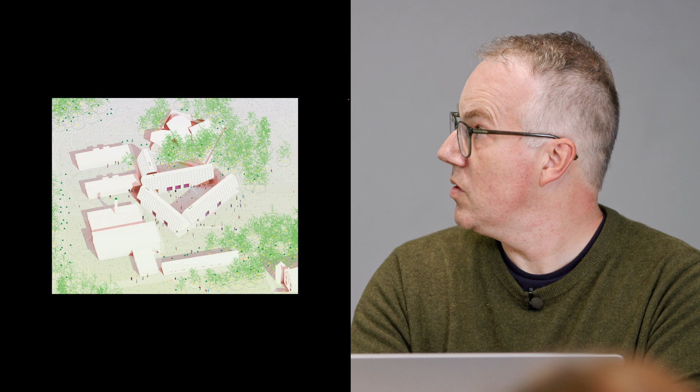We were lucky to get this project early on. It's basically a series of studios that are part of a larger campus plan, where we were trying to really focus on these spaces between. This is a house by Jorge Pardo. These are sort of traditional, almost vernacular sod roof buildings, and this is a kind of modernist art building—I think it's for ceramics or something. But we were doing the architecture school, the architecture program, photography, graphic design, I think.

The budget we were given was like the equivalent of doing an industrial building essentially, and we basically followed the material palettes of nearby industrial buildings. These are all cement panels. The only thing we did was use these hat channels between the panels, which are polished stainless, so they glisten in a funny way when you move around them. And then we really focused on these spaces, and pushed, asking them to put all these chairs and tables in these connecting spaces outside.

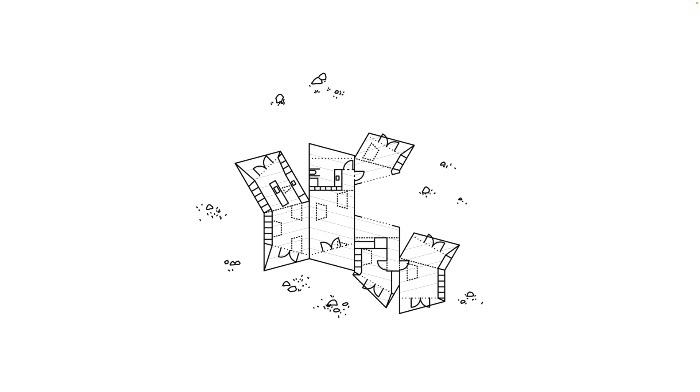I'll go faster. This is a guest house visitor center for a piece of land art in Las Vegas, New Mexico. It's done with SIPs—this is an early project as well. They're all small scale. I think I give everything in square footage, which might not translate, so you just take the zero off and think of it as square meters at the end. So, 150 square meters.

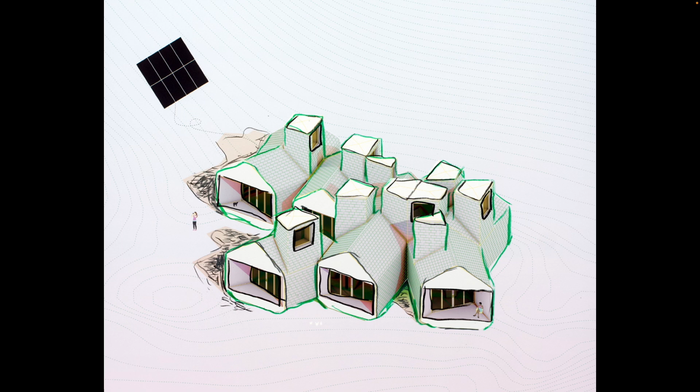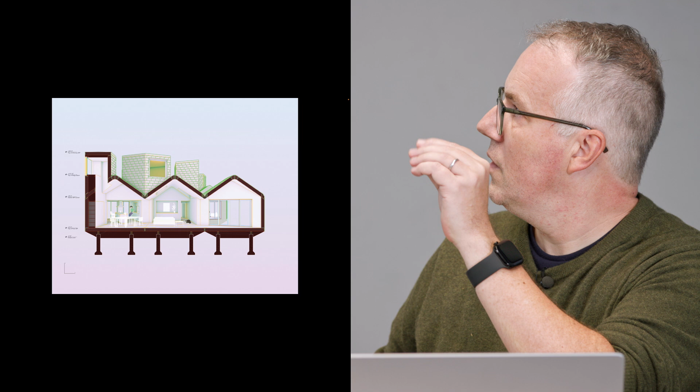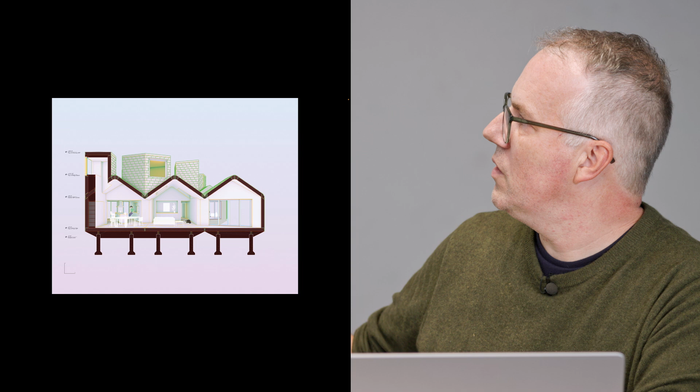These are done with SIP panels, very prefab construction, totally off the grid. In terms of material ecology, we found all the shingles online—somebody was selling them for $1 a shingle or less. They're all aluminum, with a piece of expanded backing so air can flow between it. These are continuous aluminum, so it acts like a heat sink, like a Mac computer—the heat would go here but it's in shade over here, so the heat would dissipate over the surface. We also used the underside as a cool air mass, with a vent here that pulls up to allow this to work as passive cooling.

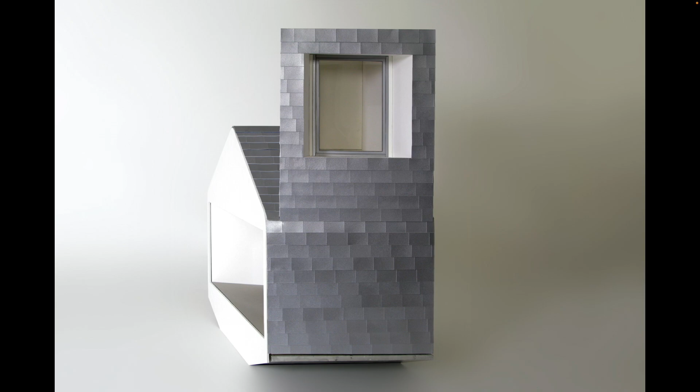It's not real, when you say you found them online, the panels—we literally were just Googling, trying to find the cheapest. We found this person who still made shingles in Oregon. A lot of times it's just about finding the right people, and they were selling these shingles cheap. It wasn't even an ethical decision of reuse at that time—this is 2008 or so, the markets were crashing, everything was falling apart.

Just to give a sense of what the office is like, we are always playing around, which may come across as strange even in the US context. Early on we were making a lot of videos—these were eventually collected into museums and stuff, but we made them for the client. The client was like, what are you doing? But we would make models, we would write little stories.

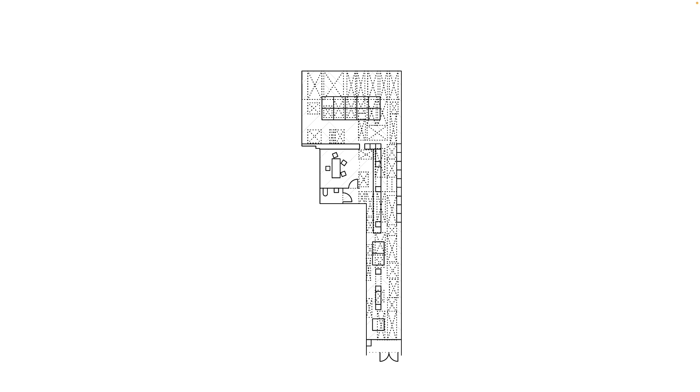This is a project for a design gallery in New York. It's at the base of the Neil Denari building, under the High Line or next to it. It's just this weird leftover space.

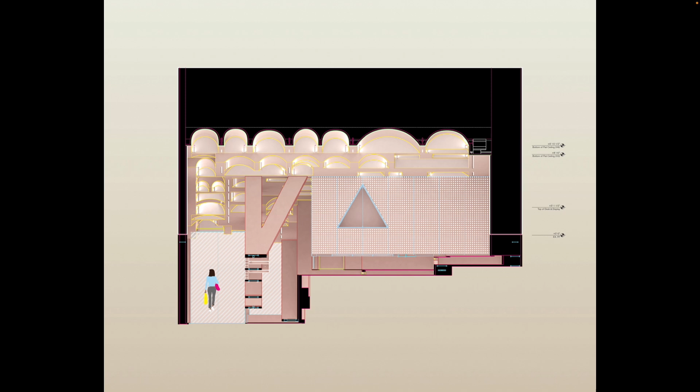We had to find this system—what do you call them—the gypsum board company that does this, like Georgia Pacific. They did a specific kind of system to do vaults. So we had to work with it and try to fit it between every bit of ductwork or structure as much as we could, to reclaim as much space. That's the project, really. Most galleries are just ceiling, floor, and lighting.

But the thing that was interesting about this for us is that we're always learning from the work, the projects, and the people we work with. I didn't show some of the early video stuff—we worked early on with artist Pierre Huyghe on some projects, and Pierre is a video artist, so some of that really affected us, I think.

In this particular case, with a guy who's a design gallery, we started thinking about design at a different scale, really trying to just make more stuff. So we made all the furniture, all the pieces—all perforated aluminum.

We did these walls made by milling the AutoCAD hatch of marble from our drawings onto the real marble. And then we made this peg system that you could unscrew and put shelves wherever you wanted for display.

And we were doing a lot. I think this was really the beginning of making a lot of the parts. We worked with SolidWorks, which has very good metal bending capacities, and we flattened all the pieces, working basically as fabricators more and more on our projects.

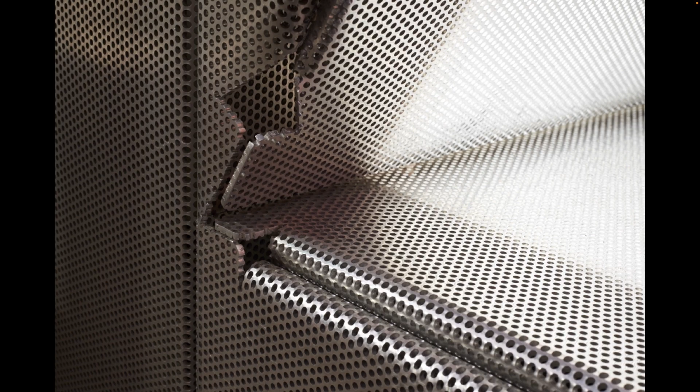Wouldn't do it like that now, but anyways, you can see it's all made. All these things were made. We had a custom mill to make all the screws, etc.

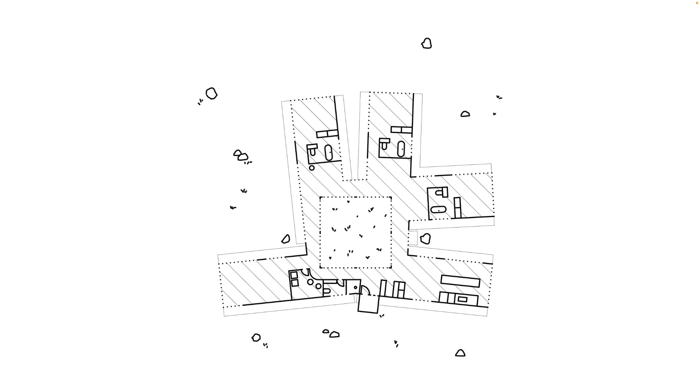And this is slightly after that. It's a house, taking the form of a house with a courtyard, a garden at the center, and then a series of volumes, all basically the same volume, same framing, kind of intersecting.

These are some models. We do a lot of models in aluminum and paper, basically, for some reason, to extremes.

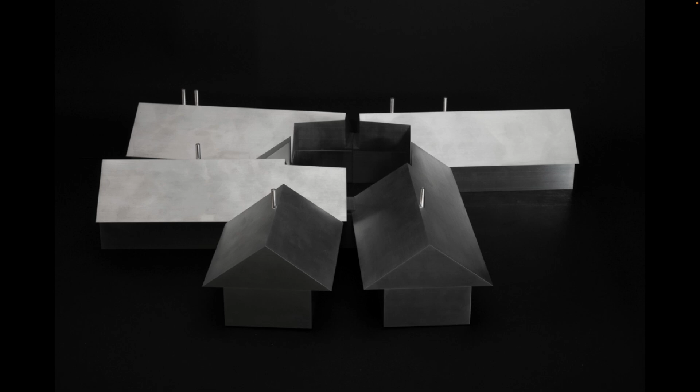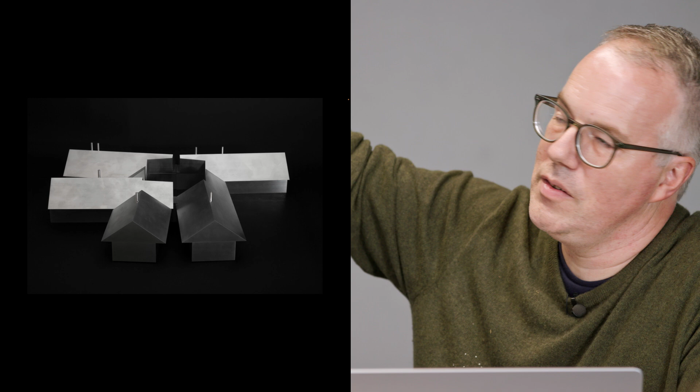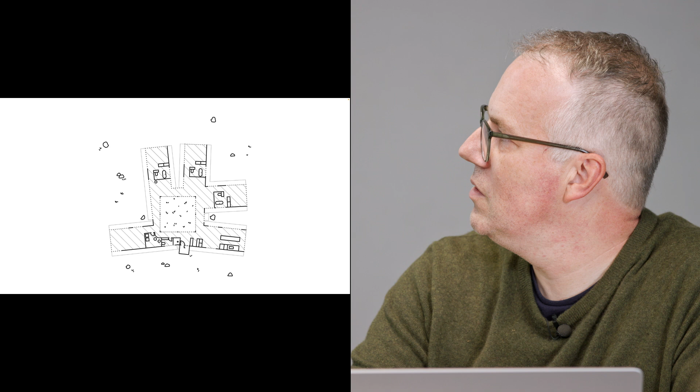There's things like this, like we were thinking about Gordon Matta-Clark's splitting, house splitting, also thinking about the inside of the Venturi mom's house. There's certain things of houses that we were trying to take in. Frank Lloyd Wright's houses, thinking about this relationship of the roof to the spaces, etc. There's stuff in here about really thinking about how to throw off a symmetrical thing, because essentially it's a symmetrical object, and then this little tiny curve that throws it off. Anyways, there were little games like that, which are what architects do.

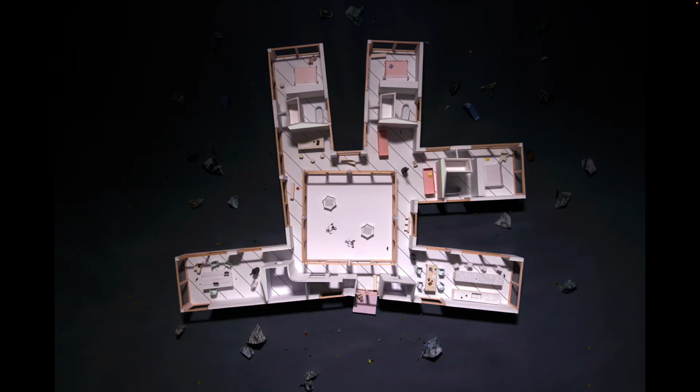The floor hatches, being obsessed with them - there's a whole thing Kenneth Frampton writes about New York 5 and how they misuse or use the floor hatch to destabilize space, which is this little known segment he writes, which I thought was interesting.

We had done another house, which I'm not showing, which actually has a similar tectonic in the same area. So we knew how to do this.

This is a private house? Private house. In the forest? Upstate, yeah. We've done a few houses for artists, and I know it's not in - I'm sure there's questions with that.

I'll show some social housing too. But same kind of thing. This is like, we've had some lucky clients where they let us - and these are not expensive, by the way, projects in general, they're very cheap in terms of cost. But we do a lot of things ourselves to probably help offset the costs. So all the cabinetry is stuff we made. All the furniture is stuff we made. And this led to a whole bunch of other things, like we were doing these and then...

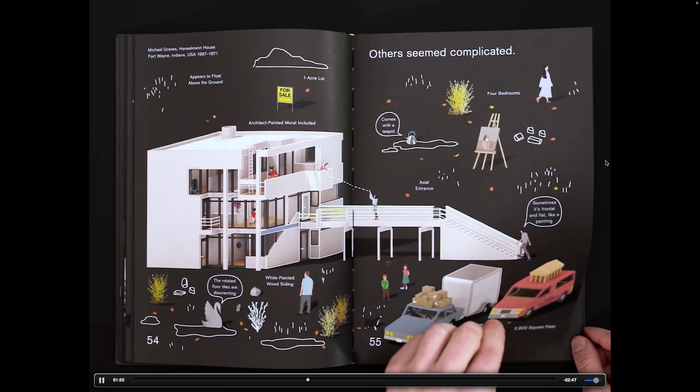We were really interested in - we had done these big books for Venice Biennale, and they were all based off of Richard Scarry, who does children's books. They're actually great architecture books, you know.

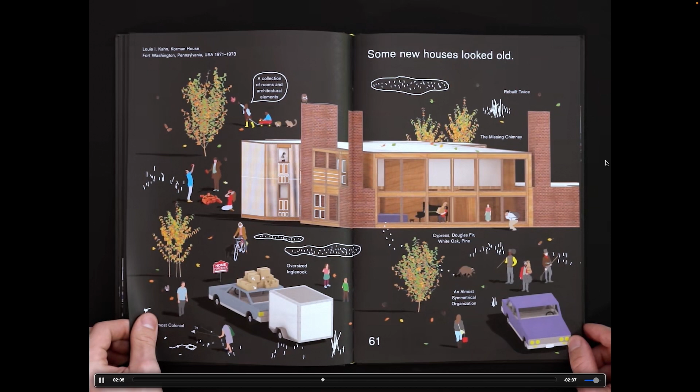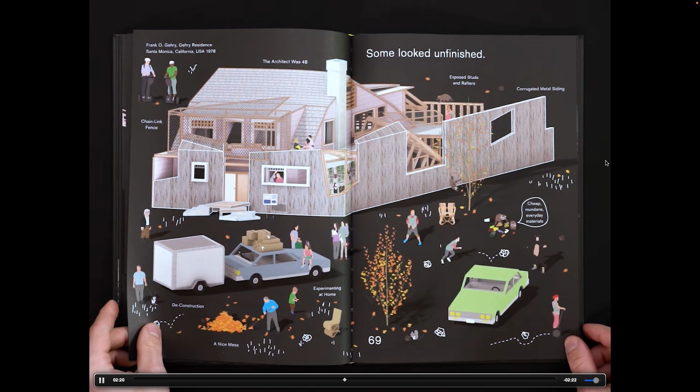I think he lived in - didn't he live in Switzerland? He moved from there - you really see the traces in all of the books. Yeah, like the way the railway station looks and stuff. Yeah, there's a lot of Swiss, not the Swiss elements, and they're really actually great for learning how to do architecture.

So they saw those books that we did, and they suggested we do a children's book with them. So we did a children's book on houses. The story is about a couple who wants to buy a house, but they can't find one. They end up building one, and then they build it, and then they end up selling it, and it starts over again. Most of our narratives are really not narratives at all.

They don't go anywhere, for the most part, they always end badly. The other things we were doing in the office, we were doing a lot of software early on, using video game physics to do form finding. These now are so easy to do, just super simple things, but at the time we started in 2005, really 2008 when we got going. So we've been doing them for a long time, working with processing, an open source, Java-based coding environment, and taking video game physics and doing form finding. It was like, for us, if Frei Otto was into video games, and if you didn't have to...

It really blurred the line between real and fake to some degree, and we were interested in this space, I think.

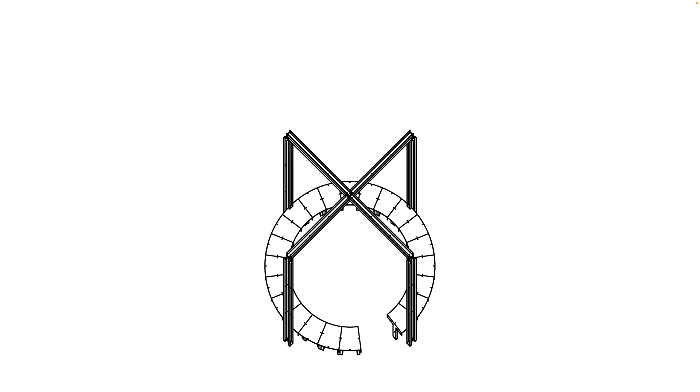We worked with Stoll, who does CNC knitting, and with this yarn called Shieldex. It's a German yarn, basically metallicized yarn, and it produces a Faraday cage. So it was called Tent Without a Signal. You'd go in and you couldn't get your phone messages.

Yeah, the other tests, actually it's out of order. But anyway, we were doing all these, constantly just making things, and with the CNC knitting, which is amazing, we still haven't used it to its fullest. I would love to just do more CNC knitting.

You have to learn a different way of actually drawing and coding. It's like punch cards more, old school punch card technology to actually get it to work, but it's done visually instead of with cards.

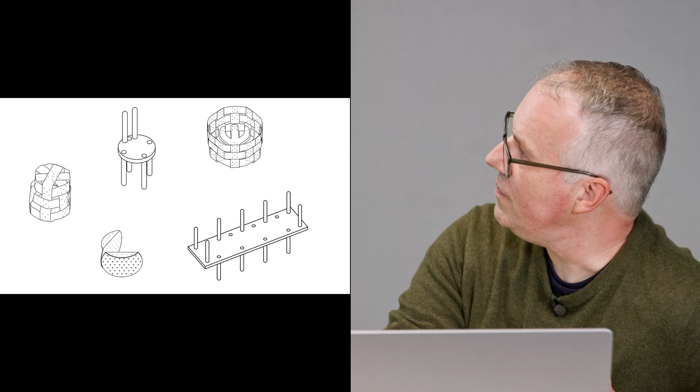So the other thing, this is a show we did at Maniera in Brussels. These are small scale objects, basically. In general, I would say we try to work with few parts, like this, and then finding certain things. Like these pegs were the largest that a broomstick manufacturer could do. So we just found a broomstick manufacturer, and the biggest one they could make, we used it for the legs and the back.

Baskets. This was a lot of work to get these, to figure these out. But these led to...

And this was a show we called Millennial Furniture, because there are multiple entendres, I guess. One is millennials, but then also the other was the Shaker laws, the Millennial Laws that Shakers would use, which we were just fascinated by—all these weird things that the Shakers in utopian societies would come up with, even for how to describe how to make furniture, or what furniture, how to live, and all these things.

We did a custom wood stove. I mean, these were all fun. They sold some. They sold a bunch of stuff, but it's not really like you can't really—I don't know, it's not a great business strategy.

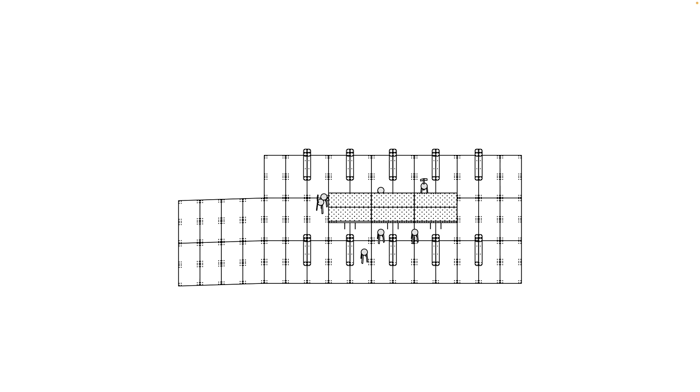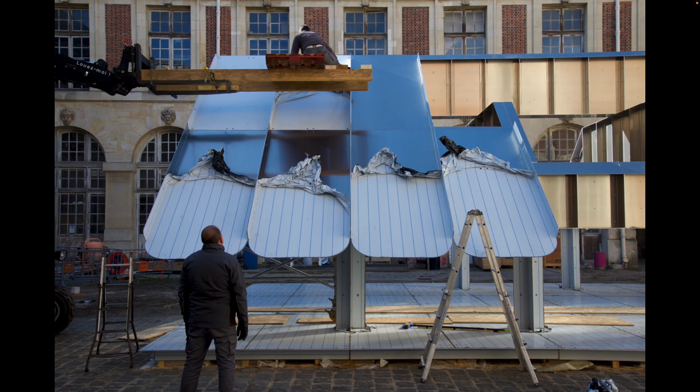We did this in Versailles as part of—it's still there—a Biennale, but it's a petite école, a little school. We made everything because we had done the Bilbao tent structure. We made this all in Spain, actually, and just drove it over. It was super affordable.

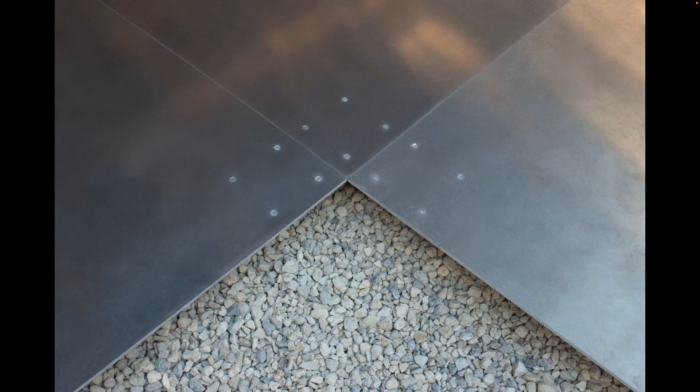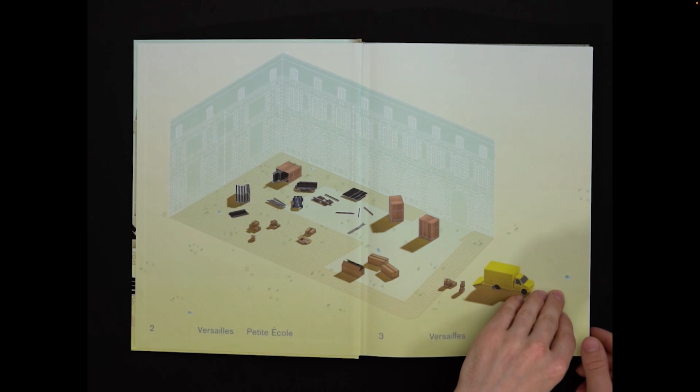They use this for like children's design school, design camp, kind of as well. So we had asked a bunch of architects—we worked on then a book for it and drawing. So we asked a bunch of architects to basically design architecture exercises for children.

This scale is also, after Petite École, we've been doing these small buildings, or I don't know what they are, like greenhouses right now. We have a couple of greenhouses.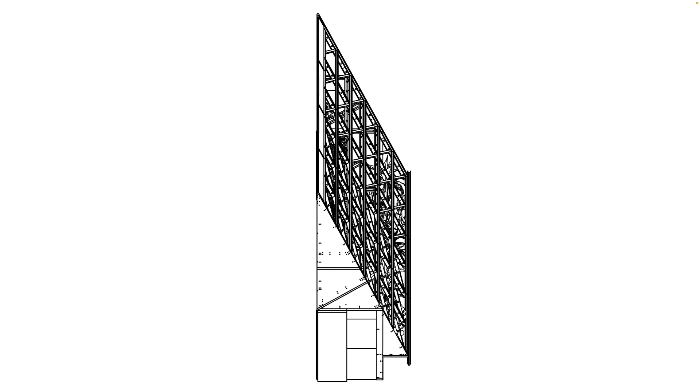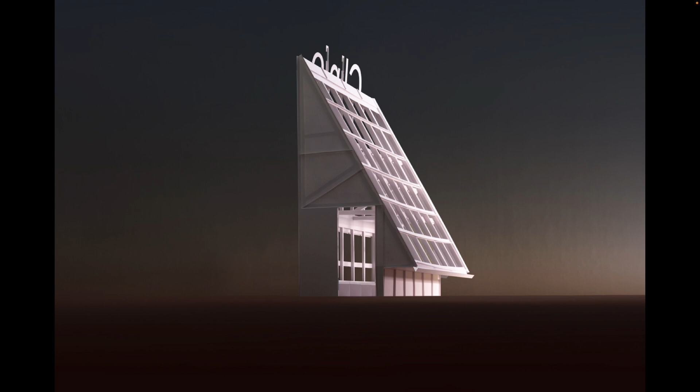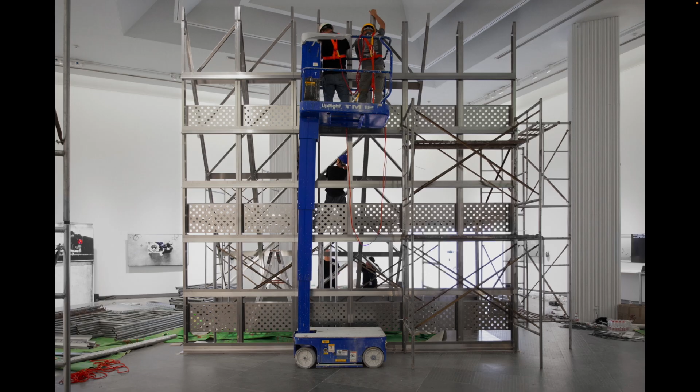This is one we did for another architecture biennale. It started out in Hong Kong, and we were just doing this as it was supposed to be an outside thing, but then it got, I don't know how it all works there, but we were doing it as a community greenhouse in a place where people could go and escape in a way and relax and be around greenery. But then it became something that got inside, and they moved it around.

This is New York kind of work. This is what you get in New York as a very typical kind of project, like just doing an apartment renovation. We did a lot of furniture also for this client.

I was very happy with these funny towel bars and things. They are in a way, I don't know if you know those Venturi chairs that they did - I just always love those chairs. They're like these bent plywood pieces. Anyways, they're very much in that mode to me, kind of super ridiculous, but they work. Just look like a flat thing, like something you'd make out of paper.

We did a lot of light fixtures also and other things for the client. It was great, a lot of fun, and it was probably rare to have somebody willing to just do all these things.

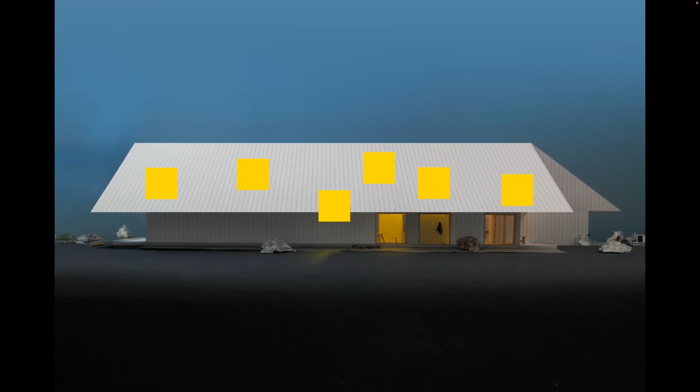This is for a studio for an artist. He's a photographer who also does basically models that he photographs. He's a good artist.

Did he interfere in the design? You know, he was good. It is a problem working with artists sometimes. You know, it changed - I mean, he was neurotic.

We had originally there was a barn on the premises. We originally wanted to reuse it. We added to it, and then it just became more expensive to do it in the end, so we had to redesign it. It was a process behind - everything that looks simple is probably years to get it to work. I'm just showing the tip of the iceberg.

But he was good. His name's Jim Casebere. He was just into architecture. He would send these long emails about his thoughts on architecture to us all the time, which was actually great.

He would tell us what he thinks it means, what we did, and how to situate it within how he understands architecture. So we'd get this kind of theoretical positioning of the project in real time by a client, which is not necessarily - his references are pretty limited, dated I would say. But he was good still.

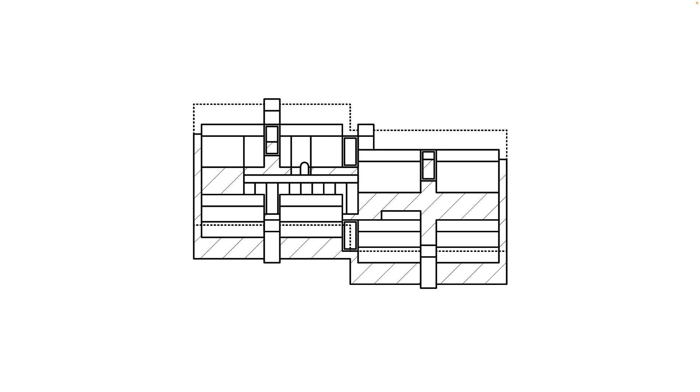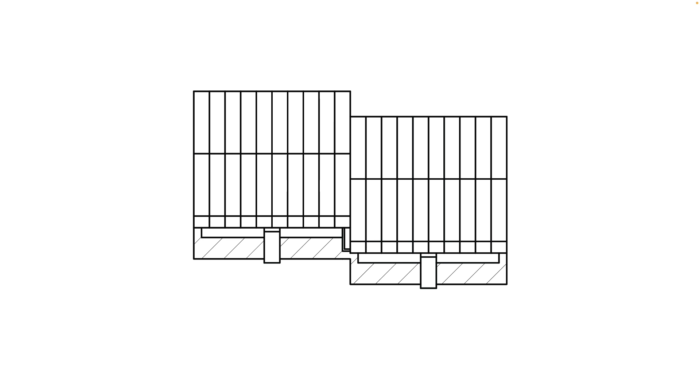There's a series of projects here that we've never built that we want to do, and this is one of them, basically looking at expanded polystyrene foam as a structural unit to make these foam block houses. This is more typical where you'd have a metal aluminum skin on it. It's really lightweight, and in the US we use this under highways, usually for forming off ramps and on ramps. It has really great compressive strength, actually, and it's closed cell foam, so it's incredibly insulative. It's like building a cave.

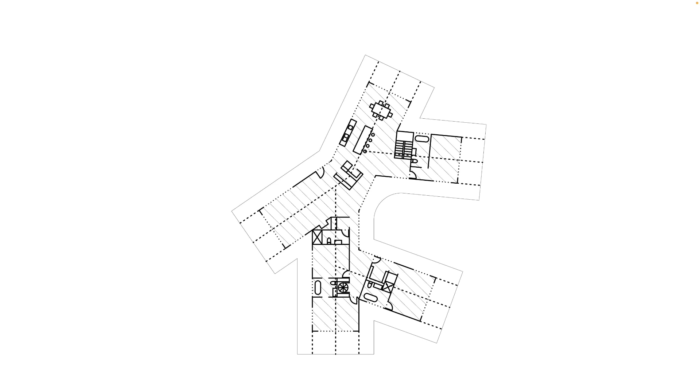We do these things and propose them to clients. Sometimes they go, sometimes they don't. These ones are in the section now of things that were rejected.

This also gives you a sense—so the models, we do large scale models. They're 1/50, or 1/4 inch equals a foot for the US, it's basically similar, which is like dollhouse size in the US. We can photograph them, and that's what we used for those videos and stuff too.

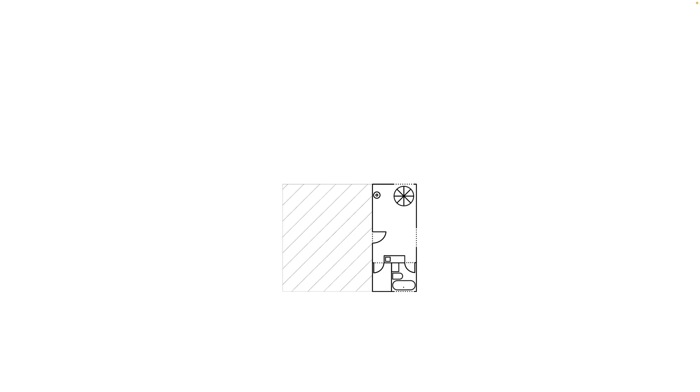This one may get built still. It's a very simple, small little house for a photographer.

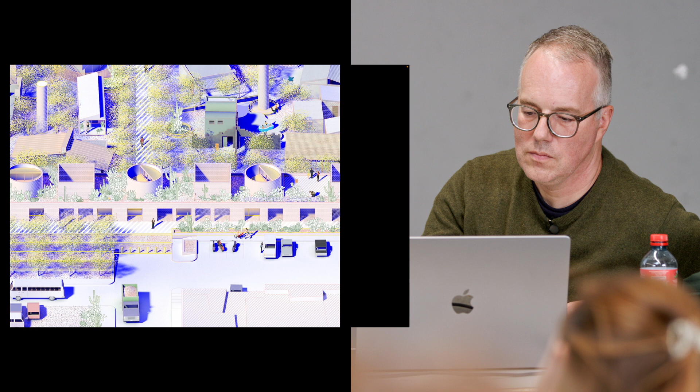These are, I think, the last projects. We did some—let me see if I can—basically we were asked to work on this kind of social housing expo site in Apan, Mexico.

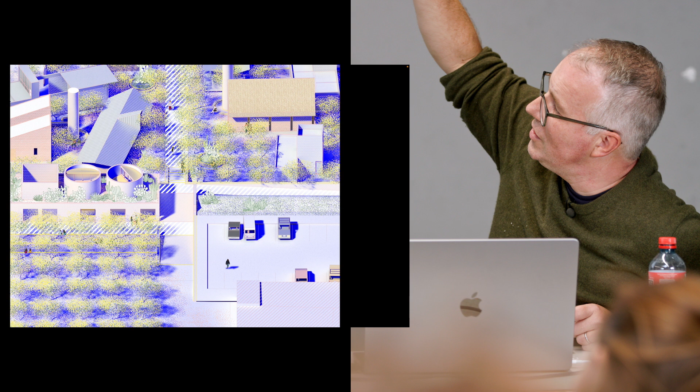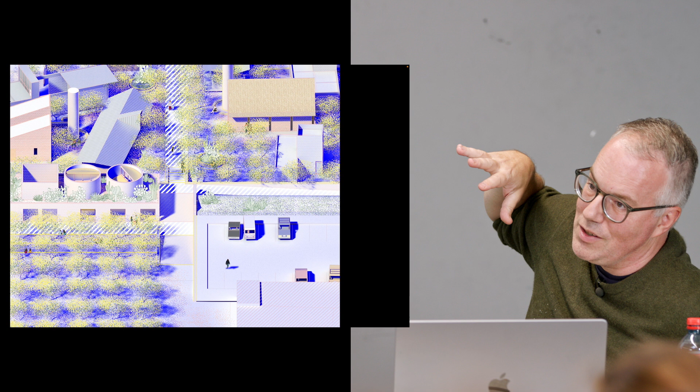We were brought in by the client, which is something called Infonavit. They're a semi-governmental agency that loans construction loans to people to do affordable housing. So each of these houses here had to be $6,000 to build or less. Very cheap. Building in Mexico is very different too, not like in Switzerland or the US. It's CMU block, there's no layers. I'm used to having a credible layered system that deals with moisture, etc. No, it's just concrete block, roof. It's very direct.

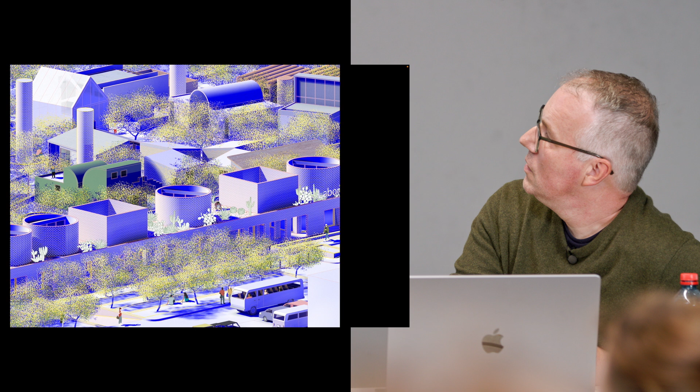Their thing was to ask 32 architects, it ended up being like 50, to do proposals for houses, in specific places in mind, so that when people came they could see you can still do a lot of different things within these budgets. Some more than others—I'm sure some are slightly over budget, but it's still ridiculously cheap. So we did this.

We had this horrible political thing where we had to go in and curate. We didn't ask any of the original architects, but they wanted us to tell people no and write a reason why they were selected or not selected for every entry—give specifics, since it could be used as a governmental document to explain why, and then come up with things.

So we kept all the original designs, basically everything that was oriented north. We left the same orientation that they had proposed originally, and that's why it kind of looks random, but it's basically to keep the same north-south orientations they had proposed. Then we had to come up with a kind of system.

We did the education building here, which is galleries, education, administrative offices, and then a kind of thing for gardens or retaining walls that could also be used for collective seating, planting a bunch of trees that are hopefully grown in now.

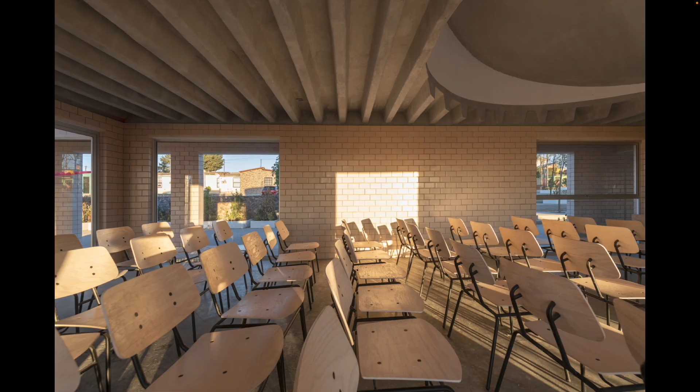I could say we haven't really, I don't think we've ever—I look at a lot of our peers and friends who are architects and I feel like they've had... I don't feel like we've ever had great projects. We always get these projects that are impossible, with incredibly broken budgets. I feel like in Switzerland you guys got it so much better, like it would be so much easier here. I don't know.

This is a housing project, affordable. Can you say something? I didn't quite understand—the other houses, they're not from you? No, they're not from us. They were all from others, like Tatiana Bilbao, Frida Escobedo, Productora.

It's a bunch of people. The people they originally selected were all great Mexican architects, like Kalach, and then the faculty of SCI-Arc, which was weird, so they had some SCI-Arc connection. We had to say, Hernan Diaz, sorry, you can't, I had to write why that would not work. It's obvious, it's like this big gigantic thing, like a vegetable growing, and I don't know who picked them, but we were like, you can't build that here.

We also asked them, we did a book as part of it. As architects, the client also saw some of our books and wanted us to do a book for the project as a kind of propaganda in some ways, but also as a book about the project in real time, so it's there for the ribbon cutting ceremony. We asked all the architects involved to pick one piece of vernacular architecture that they like and write about why. So we have these little texts from people with a photograph of something they collected, and there was a kind of attitude trying to construct vernaculars more than maybe architecture per se.

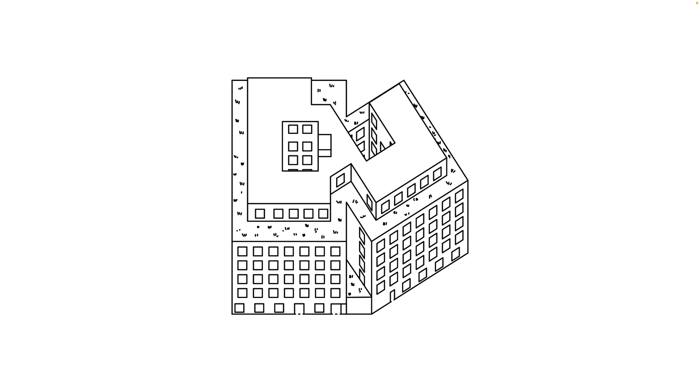So this is a project in DC. I'm showing this one even though, I would say this is the hard part about doing affordable housing. This is fully 100% affordable, federally granted, formerly homeless housing. There's no market, nothing. It's pure, hardcore, affordable housing for the U.S.

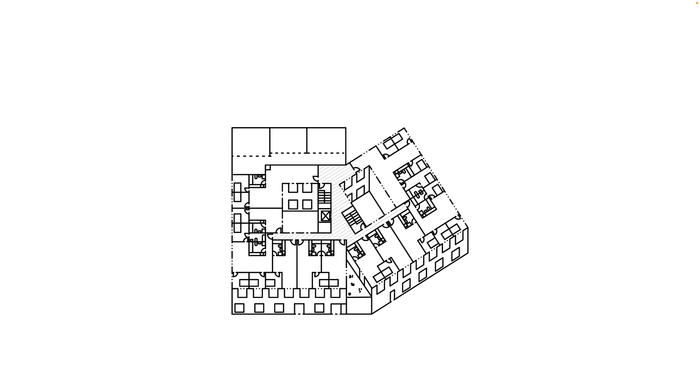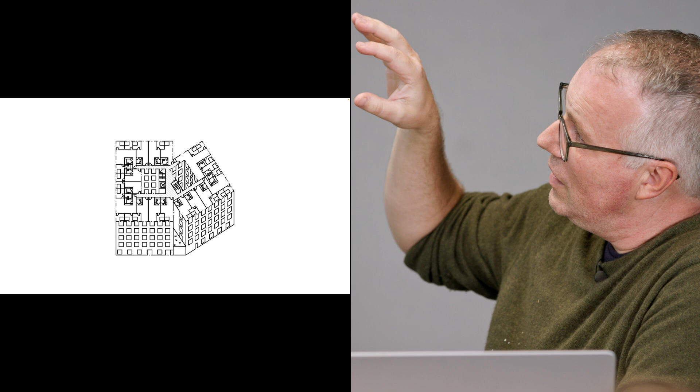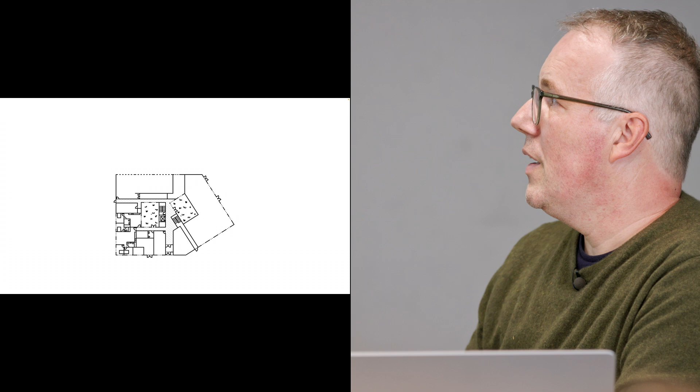There are certain things that - we were brought in because I think at one point there was one person on the developer's team who wanted to do architecture, so they interviewed a bunch of architects and we got the project. Then we went through everything, permitting, it was a long process, got everything, and then they fired that guy, and it ended up just destroying the material economy.

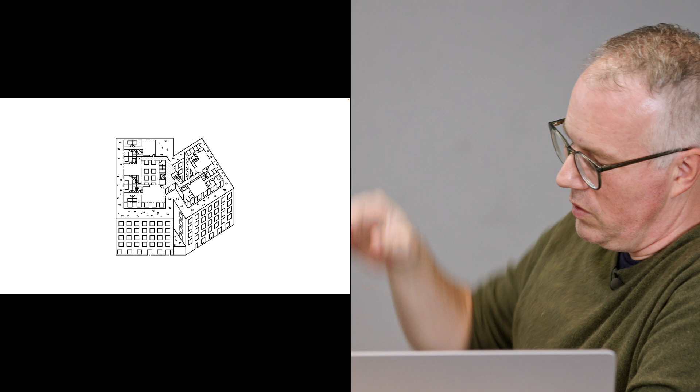What is this series called? Material Economies. On this project it's horrible really, it was really about material economy to the developer. Like, I think typologically we're happy with it to some degree. It's a very strange site, but we have units with cross ventilation.

We have 2 courtyards in these, which is very atypical. We got more units in than they thought they could, like 3 extra units that they didn't think was possible because the geometry is so bizarre. We were trying to leverage for larger windows even, and they said yes, and then they said no eventually.

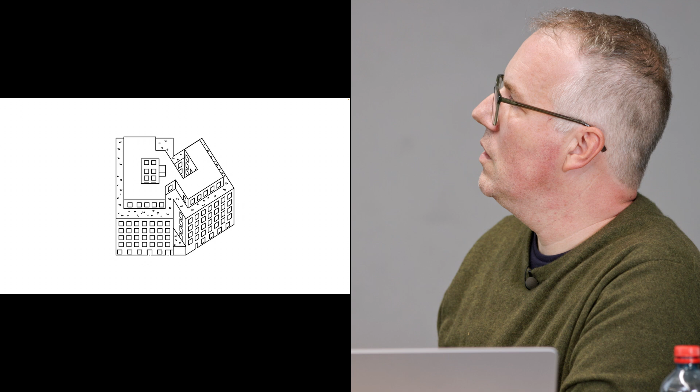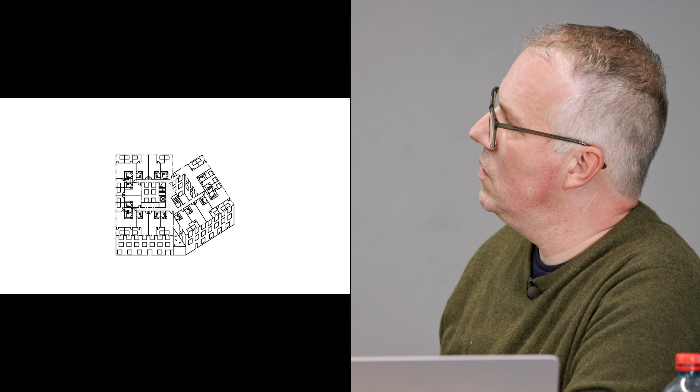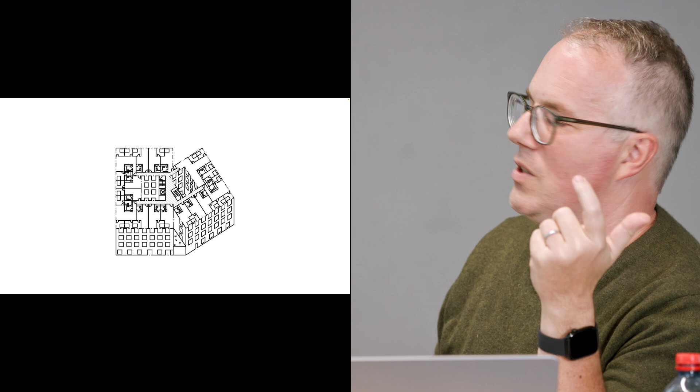So the system is basically concentric, these 2 boxes. There's a kind of concentric logic, you can see it around here. In the US we can't do a single stair, we have to have 2 means of egress. In Europe you can do 1 stair. I think up to 6 floors you can do 1 stair there. Is that how it works here?

It really depends where you are. I know in Paris, I'm always jealous of the Parisian social housing. But like...

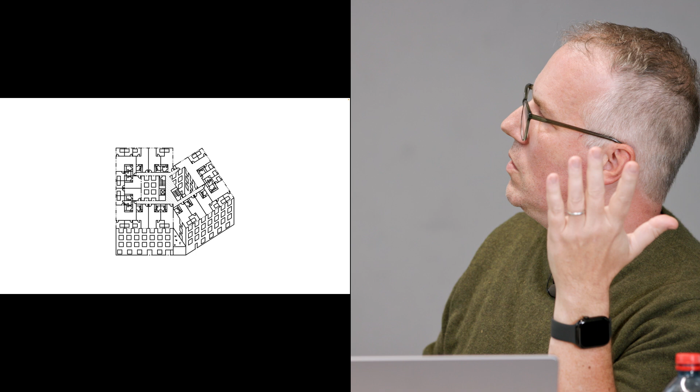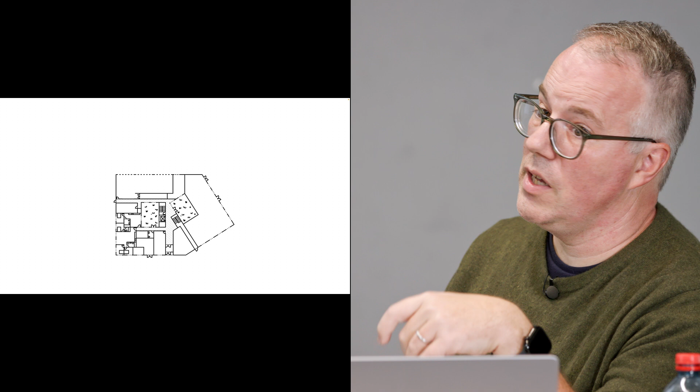Here we had to maximize the dead end corridors to be able to put the 2 units here, and allow for the corridors, which typically in the US are done as double-loaded, so you get no natural light in your corridors, no ventilation. We were happy with those basic things, but it doesn't necessarily make it... I'm not that happy with it. The side, it's just, yeah.

What's the material of the facade? It was going to be terracotta, and then it ended up being some product that we then, I don't know, it was not good, whatever it was.

But like I said, I think in some things you can just be happy if you shift the typological approach. Maybe we should just find a way to be happy with that.

Other things going on in the office were research on the city, things that happened right before and during COVID. It was a kind of COVID project. We were mapping out vacancies and documenting them, taking public data and documenting where vacancies are, and also calling out everybody who owns it.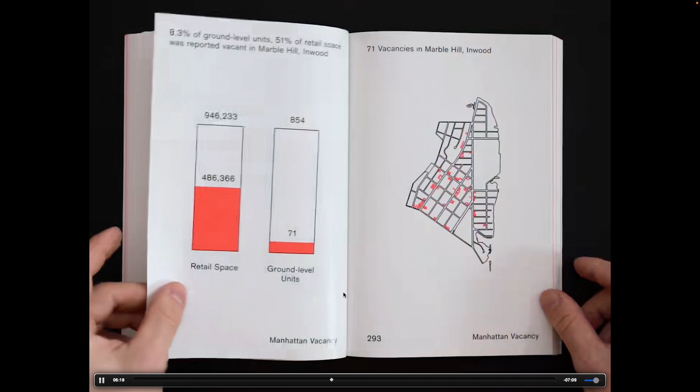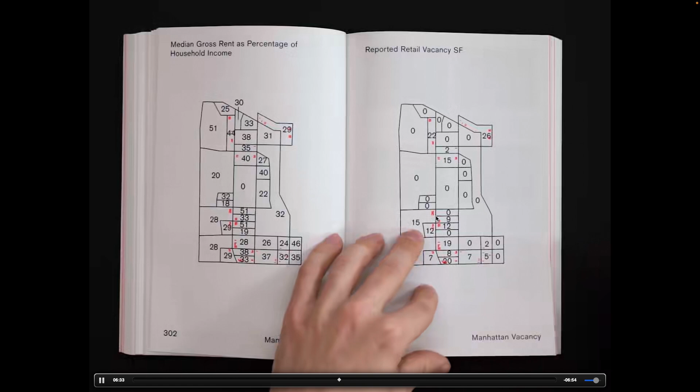This was a way to think about it, and at the end of the book there's thinking about these spaces — primarily ground floor retail spaces — a lot of which are owned by financial instruments. Some of these are absurd, vacant for like 3,000 days or something, because they know it's cheaper to take it as a loss than to actually rent it out.

At the end we did design studies of how you could reuse or rethink the ground floor. In a lot of cases — it's very common in Europe but less common in New York — to have the ground floor with housing at street level. So it's just looking at that stuff.

This is a project that came after we did the project in Mexico — this is the last project, or maybe second to last — it's social housing in Asunción, Paraguay.

It's a high profile project in some ways. We were part of a larger list, and eventually it went down to 4 people, and then it went to us. We also brought in some of our friends to work with us.

This is the site here. This is the main cathedral, this is the presidential palace, this is the Congress. So it's right in the heart of the country — a well-known site.

It really is like — it was a doctor's land, this guy Roberto Bruges. He had all this land, and being a very devout Christian, he let all these people come stay on his land who couldn't find any place else to live. After generations, they just live there, and there's no plumbing — it's just corrugated metal over CMUs.

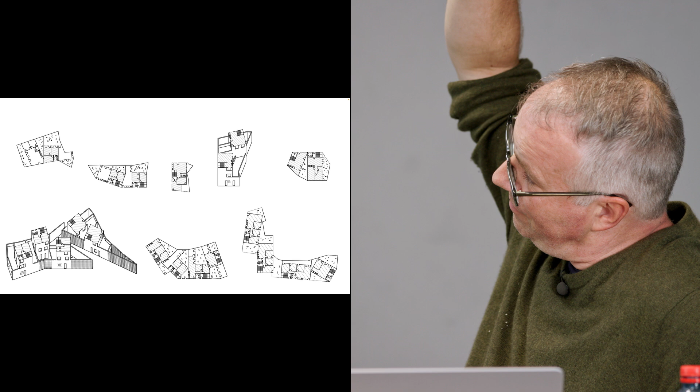The government decided, because it's so close to the center of the city, to provide social housing for everybody who lives there. So everybody gets a house — generations get a house. They were all documented with very specific information, like so-and-so can't go up a flight of stairs, so-and-so has a heart condition, so-and-so has to be next to their daughter. You got these crazy spreadsheets — really intense spreadsheets with also lists of kind of humanity.

The way it works is on the ground floor there are basically ground floor apartments specific to the site, with courtyards for food production and air. There's no common spaces except for the street — you enter off the street — and then the towers are also a unit with a separate entrance, but the towers are repeated.

Sometimes if they have a larger family of 8 or 9 people, they need a double tower. But basically that's the structure — a tower on top, with exterior space on the roof terraces of the other apartments, and also the roof of the tower.

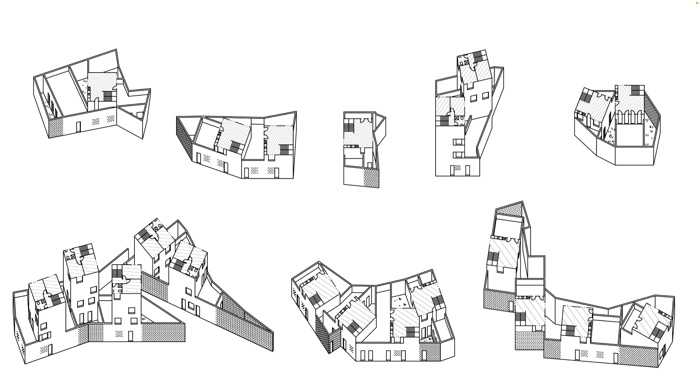We had to go through it, there was a real desire to be sustainable. The site is also a ravine, it's a kind of extreme topography.

One of the things that was cool from a purely architectural point of view is we thought it was the most high-tech experience we've ever had in architecture, in the sense that all of the surveying—probably very common here, but it wasn't for us—was done with drones and scanned at high resolution. So we got these crazy scanned sites to work with, which we had never dealt with before, and we were surprised because we thought that would not be the case. So then we were using them for drawings and things too.

Basically we started off doing things like compressed earthen blocks, but eventually it became brick, because the soil is kind of amazing—it's this really red soil.

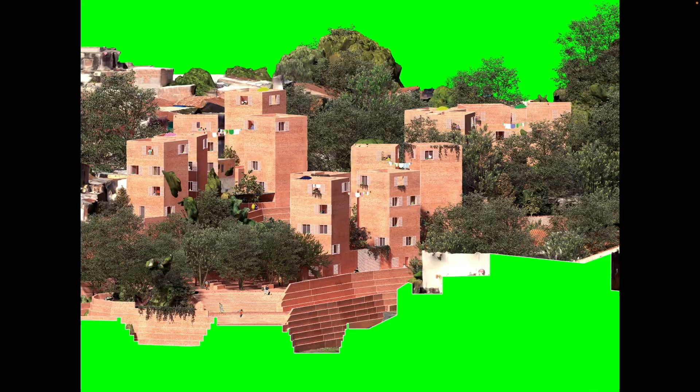This is under construction right now. I think I have one little photo.

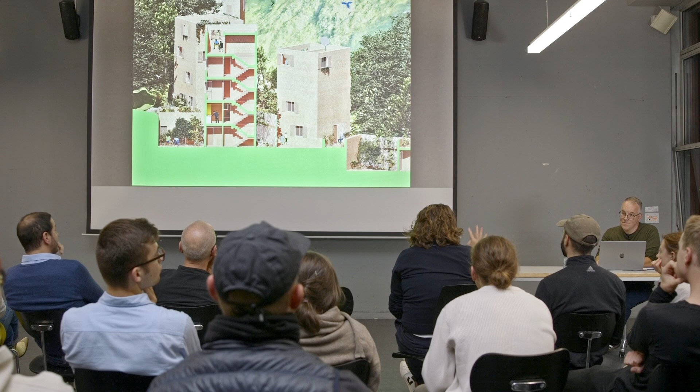How come they haven't chosen one of the four as well? How come you do all of these? Oh, you mean all of these units? Right, there were four teams involved. Oh no, we worked together. So we were hired for it, and technically it's underneath our name for some reason.

But we brought in Adamo Faiden and also Equipo de Arquitectura, and Equipo's local. They're meeting with people. Adamo we just have a long relationship with. Actually, we have a winery we're doing with them too—I think it might be in here.

When we do those projects, we deal with them—we don't do executive architect and design architect structures, we just treat it as a collaborative. We split the money equally, and even if technically contractually it's under us, I think in some ways it's probably easier to sue them.

They're closer, but I don't know. We just try to split everything equally, because we've been in situations where we've worked with others, and if you have to negotiate that much over the money, it just ruins everything. Money ruins everything in general, but for sure it ruins relationships with architects. So we just try to keep it simple.

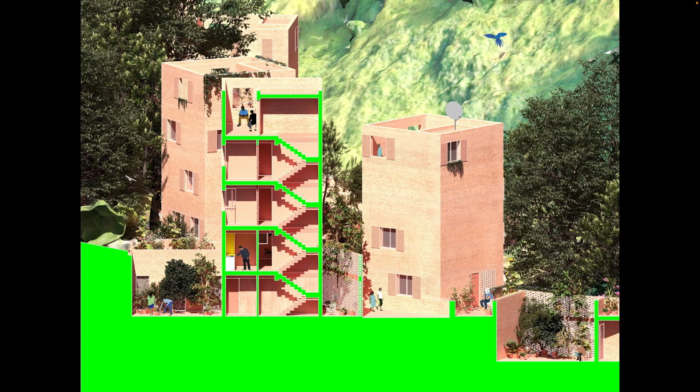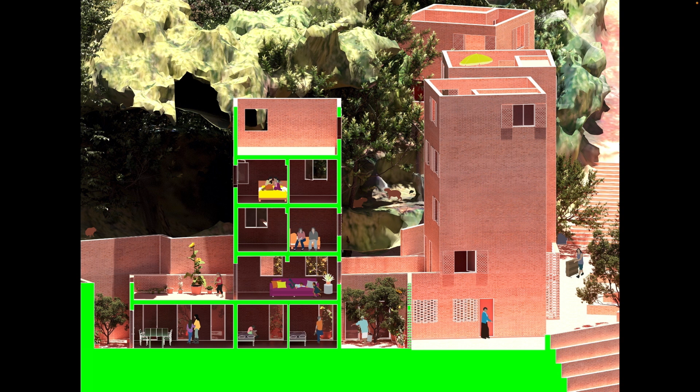So I would say it's not collaborative in the sense of like, okay, we did this and they did that. It's like we all sit around the table, we throw things out, we draw, we respond to each other. We share one Google Drive that everything is in, if you want to know the nuts and bolts of it.

Michael, could you talk a little bit about the bricks—you mentioned the local earth. They ended up being brick. They're locally produced, but not what we wanted to do them as, which was really compressed earthen blocks. Structurally they weren't strong enough, and the engineers said we couldn't do it in the end, so they ended up going with standard masonry.

We tried, we pushed for it. Also it was more expensive. This is a winery in Mendoza.

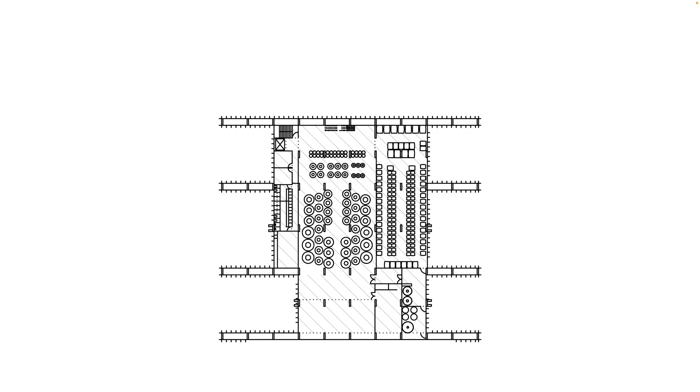It's basically within the landscape of this little valley. Then we fill it in, and it just ends up—it's almost like a land art project to some degree. But you can go in and out, walk around it, on top of it, move around into it.

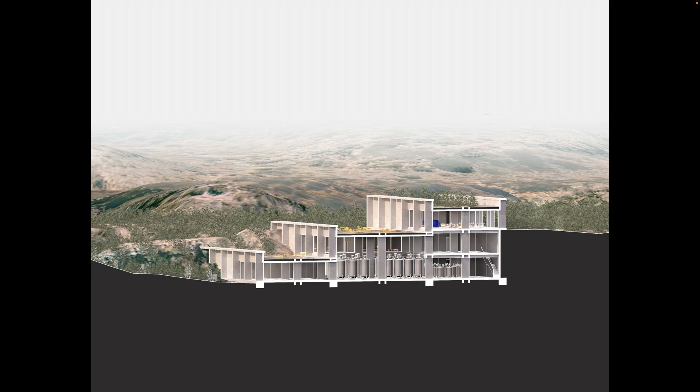Again, I wanted to end on a small one—this is another greenhouse.

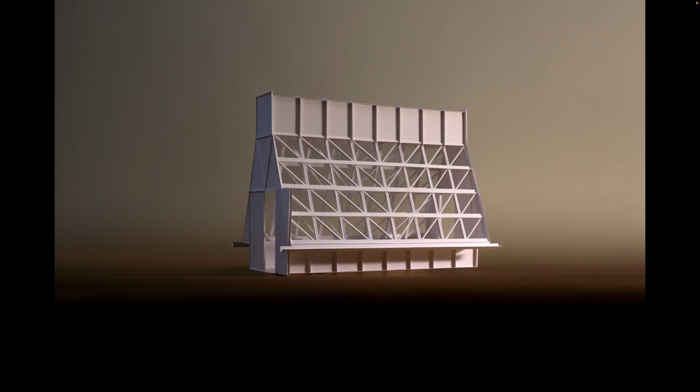I have others, I don't know what you guys—I've written a whole bunch of stuff, I was going to try to show. I wrote a whole thing on smaller architecture. I'm not going to go into it all, but really trying to think about material ecologies, and also trying to think about how I understand architecture at the moment.

If anything, I think a lot of these things we're doing is trying to—you're doing your work, but you're also trying to think about the context in which you're working, constantly. And I think that's the problem of an academic architect to some degree, that we come from. At the moment I just think scale is probably where we are at. I don't think it's necessarily the same here—there's a real concern about politics and justice in certain ways that I think architecture can't really address directly.

I mean, it doesn't make sense to me. But I think it can address things like the question of politics and justice through scale, and I can understand it through scale, that question. But I can't really understand it just in terms of architecture's agency. I don't really understand it.

But I think there's a problem, maybe a problem of capitalism to some degree too, when architecture just grows and becomes huge. The whole thing was like taking this little bit of a Robin Evans quote that I stumbled upon from Translations from Drawing to Building, where he says—I'll just read the first paragraph, then we can do questions. It's a polemic thing about this.